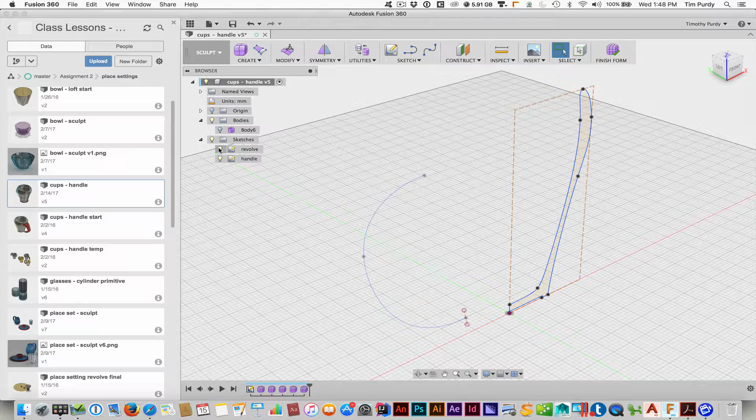So let me toggle that off, turn back on the revolve cross section, and then I will go in and create the revolve again. So pick that and then go down and pick the axis, which you can do right there. Now, whenever you do any of these tools like extrude, revolve, sweep, and loft, it basically approximates what's there because of the T-spline technology.

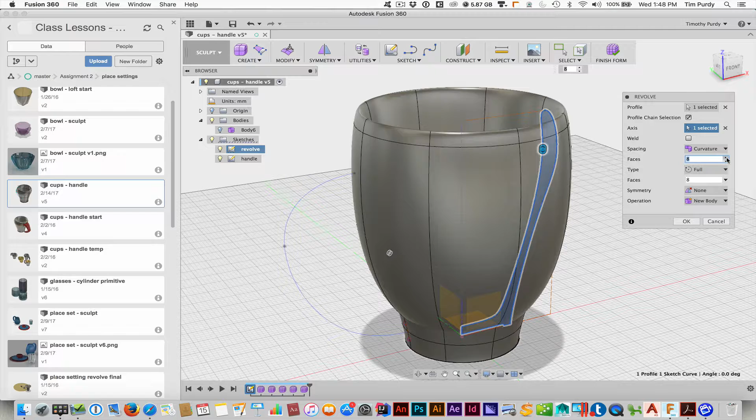And as you can see, we're not quite following the cross section that's there, and definitely some of these areas are way off. So what you do is you start increasing the number of spacings here. Now I'm going to go ahead and jump to what I know is pretty close. Let me show you what happens. So it'll jump all over the place. Sometimes it gets closer. So it actually looks pretty good, but it's got this weird bump in the middle now.

Well, it ends up going through this, and having done it a couple times, I know 21 is pretty close to what I want. So it may take a fair amount. A lot of what adds complexity to this is simply this flat bottom with the sharp edges. Curvature does a pretty good job of approximating the form. You can try uniform. It'll evenly space everything out, but as you can see, it doesn't quite match up what's there. So we'll stick with curvature.

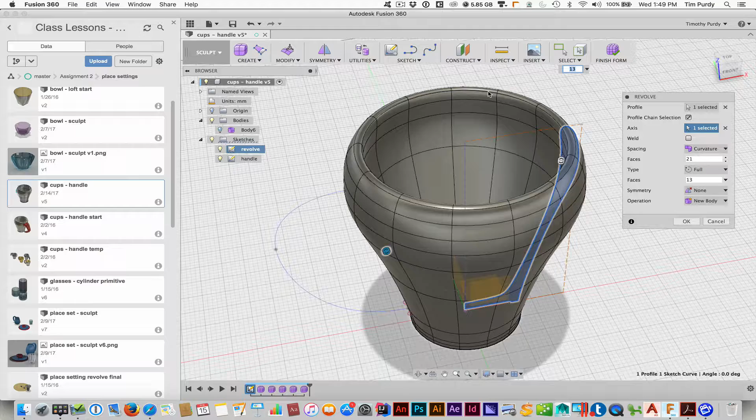Now, on the number of faces around the circumference of this, the trick is to actually do an odd number. Let me show you why. So let me go in and choose 13. That's kind of the start of this revolve, it goes around and comes back around and ends up there. Doing 13 will leave us a good patch right there, our face, that we can pick and delete and then use for the bridge tool.

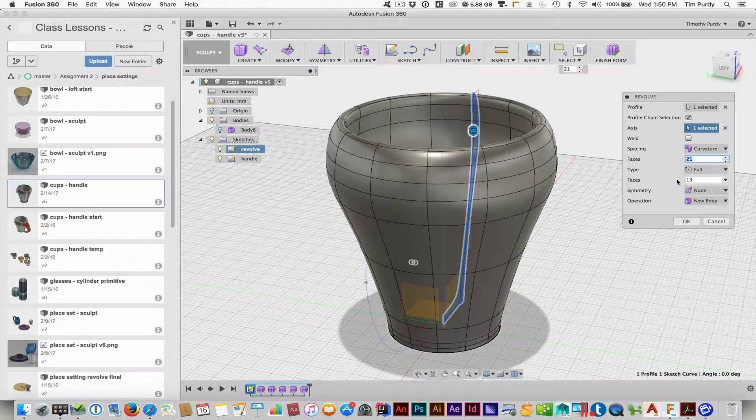If you want something smaller or bigger, you can just go in and pick a different one, 11, see what that looks like. So that's 11. It gets a little bit bigger areas with each of those. So once again, it's more about how wide you want your handle at this point. All right, so we'll stick with 13 on this. Hit go. Now we've got our basic revolve shape.

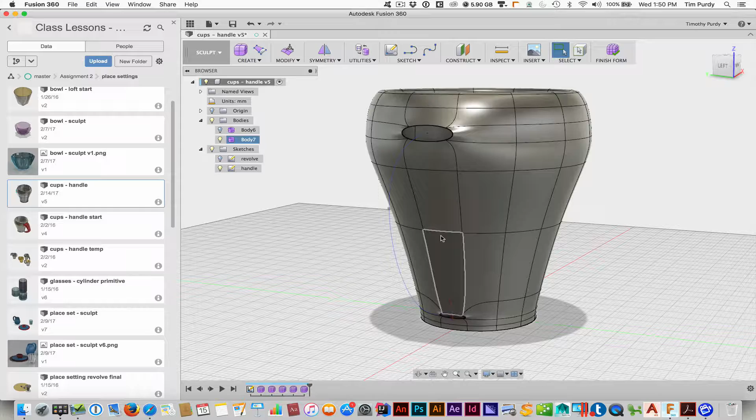So what we're going to do is come in and pick the face right there, which is where this curve is kind of tangent to, and hit delete. And that makes this opening there. Go down and do the same one at the bottom. Pick that, hit delete. Now, before you go in and do this, you may want to modify these openings a little bit. Let's do this bottom one for sure. It's very tiny as far as the size.

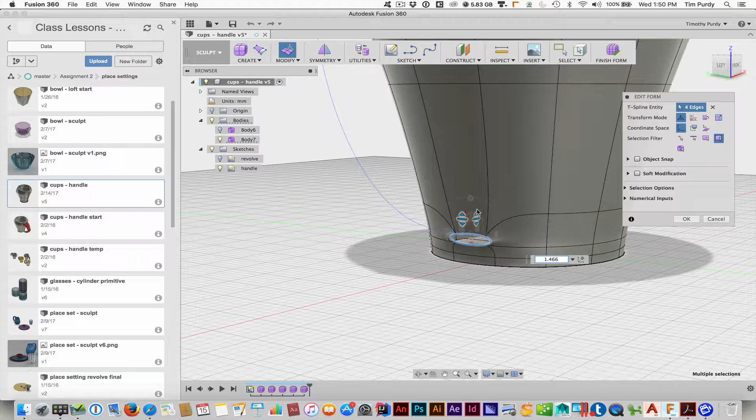So I will double click to select around the edge and use my modify tool. Do a little non-proportional scaling to enlarge it vertically. Looks good. Maybe pull it up a little bit so it's centered on my curve that you see there. And you can do some further tweaks like twisting and so forth.

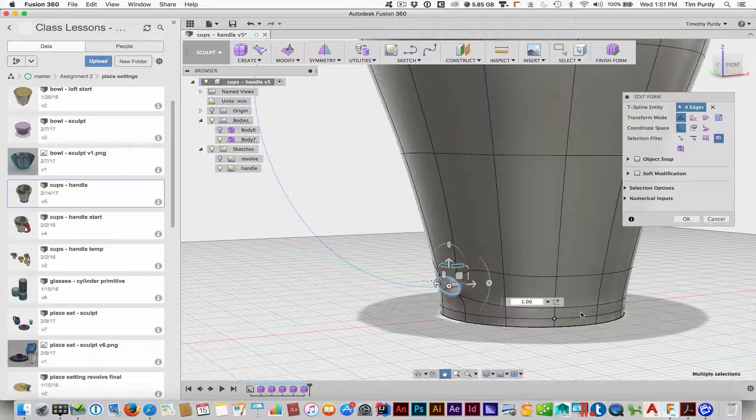And let me do a little bit more. Oops, I twisted it the wrong way. I'm going to grab the non-proportional scaling. There we go. Okay, so that one's pretty good. I'll leave the top one as is right now. Hit OK to that.

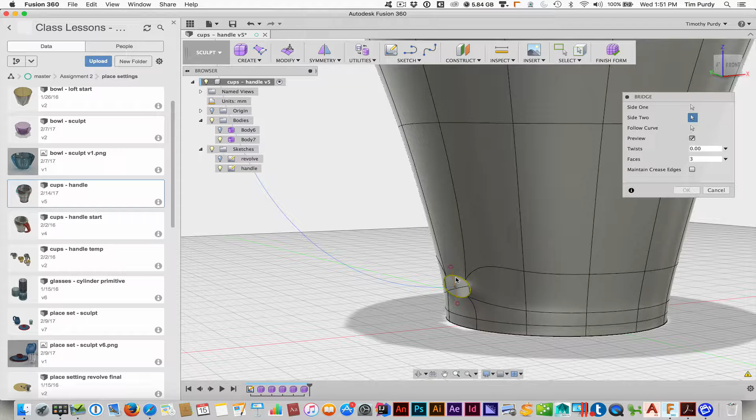Now we'll go and use the bridge tool. So it's right here in the second set. Choose that. So basically it's got three inputs. Here's side one, and so you basically double click to pick the loop there. Click on the next arrow, double click to select side two. Make sure we get the actual edge. Good. And if you want to, you can go ahead and hit preview.

Now, I think it's not building properly. I don't know if maybe I misselected something here. Let's try this top one again. There we go. Yeah. So you can see it's going to go ahead and build something. It's going to be flat between these two at this point, which is not quite what we want. So instead, we want to have it use this follow curve. Okay, click on that. Now you can see we're starting to take the shape.

So the next thing is how smooth you want this. Right there, the number of faces along this will control that. 6 is kind of a good number, gives you enough subdivisions through there, it follows it pretty well. If by chance your curve ends up on the opposite side like that, that's what the flip curve will do for you. Okay. Curve rotation will go off, and let me see if I can get this to show up a little bit.

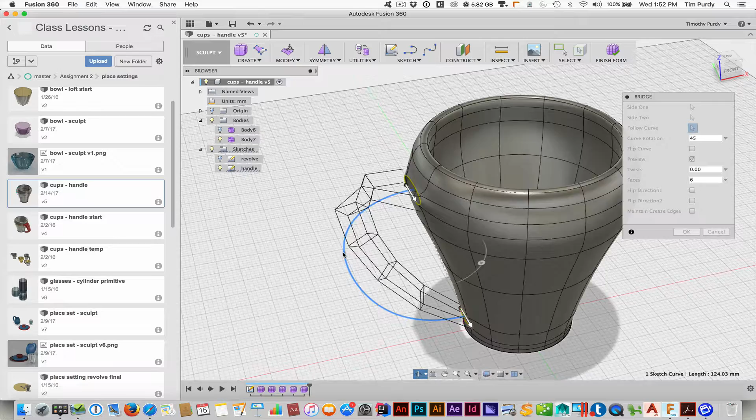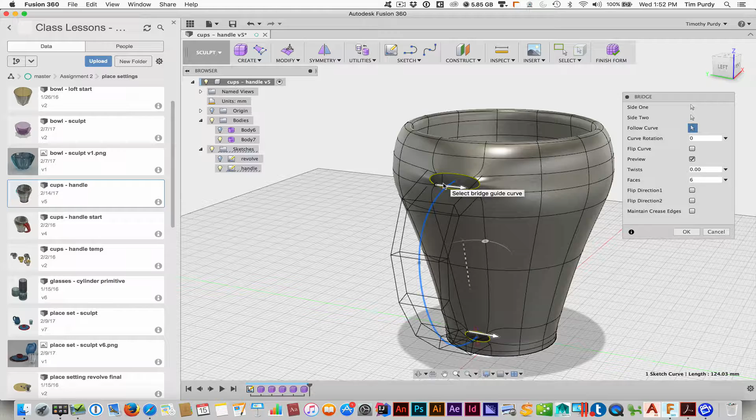45. In essence, if you want this to kind of twist around the curve or twist off the curve, you could do something like that to create an interesting shape. Let's go back to 0 on that part. And then finally we've got twist, if we want to twist it as it goes through. Now, the one issue you may run into is these arrows. This kind of tells you how this opening is aligned. If you flip it, notice what happens then, in this case, that it actually twists.

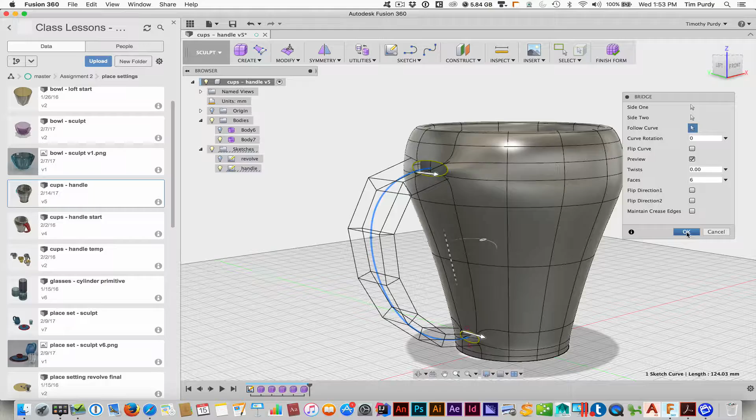So if you ever run into a situation where it's twisting, using this ability to flip these two arrows may help get the two side openings aligned properly so that it will actually build the bridge correctly. Alright, everything looks good. Hit OK, and there we go. Nice handle there. Now keep in mind, this may just be step 1. I may then want to go in and start further sculpting this because maybe it came out a little too thin.

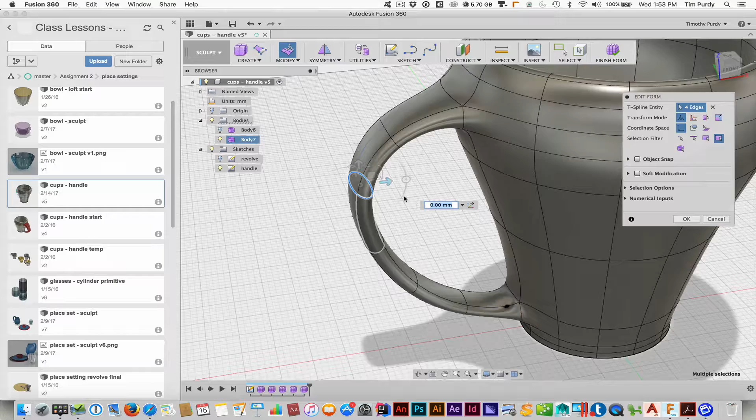So a good rule of thumb is to come in and double click on these cross sections, and choose edit form. Okay, and once again do some non-proportional scaling maybe, or proportional scaling. So let's see if I can get to this. I want to get around here and thicken it up a little bit. So I'll grab that scale indicator. There we go. And as always with the edit form tool, we can just double click on another section real quickly, change it. Now in this case, because this is kind of vertical, we can actually use this one. We'll go with that one to increase the thickness there, and jump down to this one.

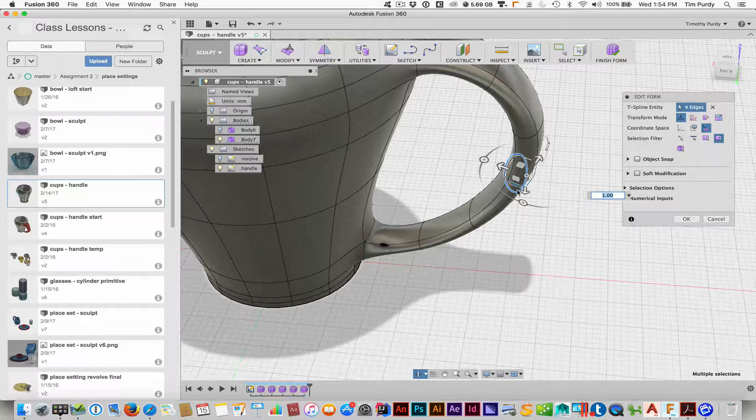Okay, now changing this to a local coordinate system may help align how we want to do this scaling a little bit better. And that one, did I pick the right thing? Yep. It's a little different from what I expected there. That's working, but for some reason with the scaling outwards, I'm a little surprised it's not pulling it out better. So actually I'll go back to world and see if it does anything differently. A little bit, but it's kind of a twisted angle. And then I'll go through and do this one real quick. There we go. You can see you get some things like that.

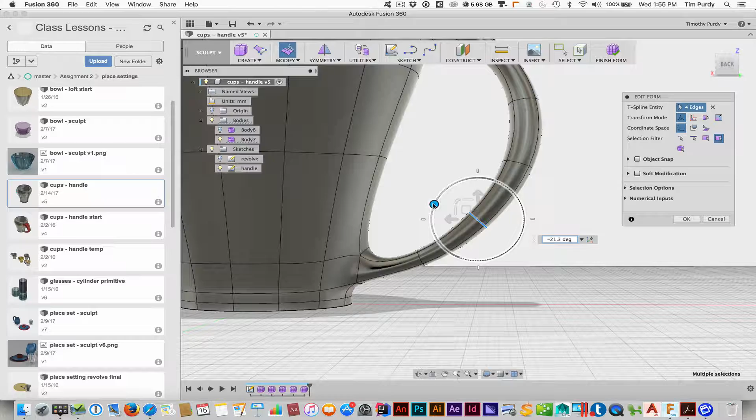And also, as always, you can go in and rotate these around a little bit, if you want to help with the layout of this. And if you want to do something a little interesting like that, let me go back in and double click on that one, and further play with this, so you can easily twist the handle and add some more interesting form changes with it.

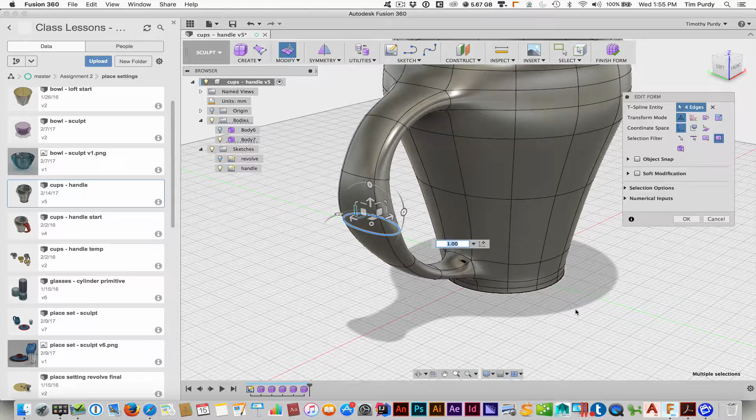Okay, so that's one of the basic ways to go through and create a handle based off of two openings and a revolve, and then drawing a path for it to follow to create something like this. Okay.